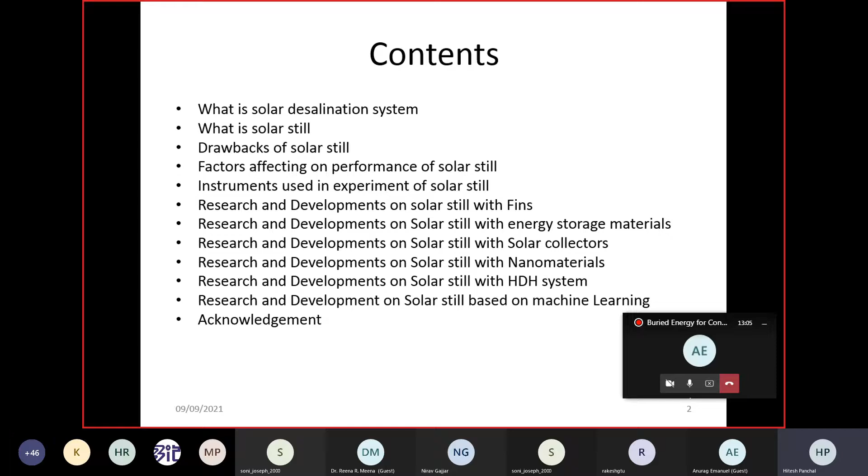After this presentation you will understand regarding solar desalination. These are the contents: what is a solar desalination system, what is a solar still, which is a part of the solar desalination system, the different drawbacks of solar stills, factors affecting performance of solar stills, different instruments used for solar stills, then step by step research and developments on solar stills with fins, with energy storage materials, solar collectors, nanomaterials, then the humidification and dehumidification system. And today, as you all know regarding machine learning, I will also cover some research work done on machine learning based on solar stills, and the latest technology. So these are the contents of my presentation.

Now, this is called a 2 hours lecture. So actually in these 2 hours, it is my duty to tell you about the learning outcomes, meaning what will be learned in this lecture. So after the end of the session, participants will be able to understand: number one, the definition of the solar still, which is basic. Then the different factors that affect the performance of the solar still. Then use of fins, storage materials, solar collector, nanomaterials, and HDH system, etc. And lastly, it is very important to understand future research work on solar stills.

Now in my presentation I have taken certain figures and content. I have filed many patents, so due to filing of patents, it is my duty to explain that whenever you take any figure from anywhere, you have to cite that particular citation, or write that whatever figures or contents you are using are only used for education purposes. I am not going to use any content except for education purposes.

Now these are the Google Scholar citations. Earlier a very good introduction was narrated by the coordinator regarding citations - around 4,000 plus Google Scholar citations I have, and among the 4,035, the H index is 40, and I10 index is 93. What is H index 40? That means there are 40 or more than 40 articles which have been cited 40 times. And I10 index means there are 93 articles which have been cited 10 or more than 10 times. That is why the I10 index is around 93.

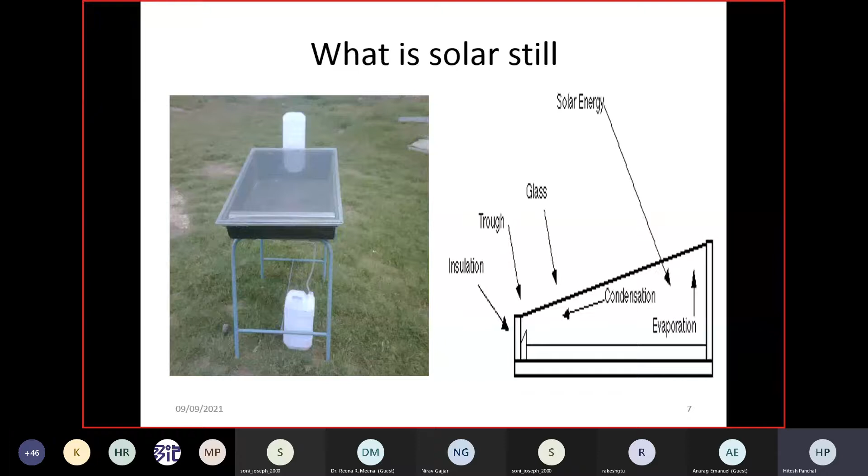So this is the working of the solar still. Actually, why are we working on the solar still or solar desalination system? As we all know, whenever something has a drawback, it is the duty of the researcher to work on it. So actually there are many drawbacks of the solar still, but for easy understanding, I have put only 5 drawbacks. From these 5 drawbacks, you can easily understand about the drawbacks.

The first drawback of the solar still is...

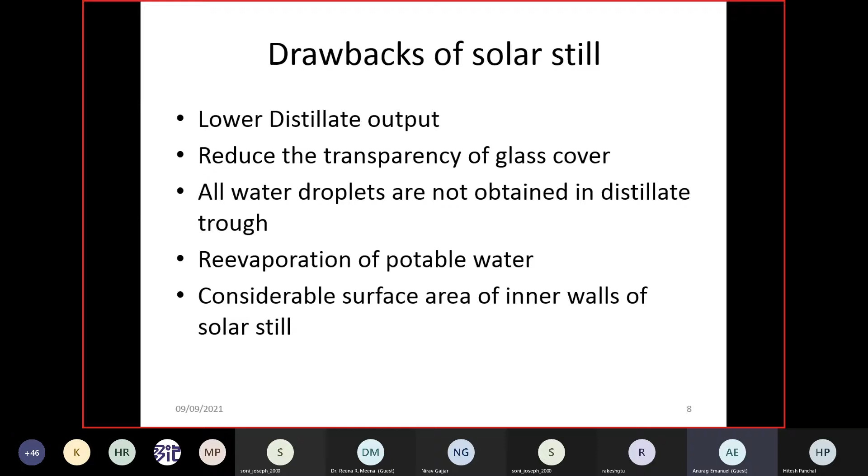Hitesh sir, your audio is not audible. There has been a power failure on Dr. Hitesh Panchal's side. He will join us soon, that's what he has said. So we will wait for him. He'll take a couple of minutes to join. Please be with us and cooperate. Thank you.

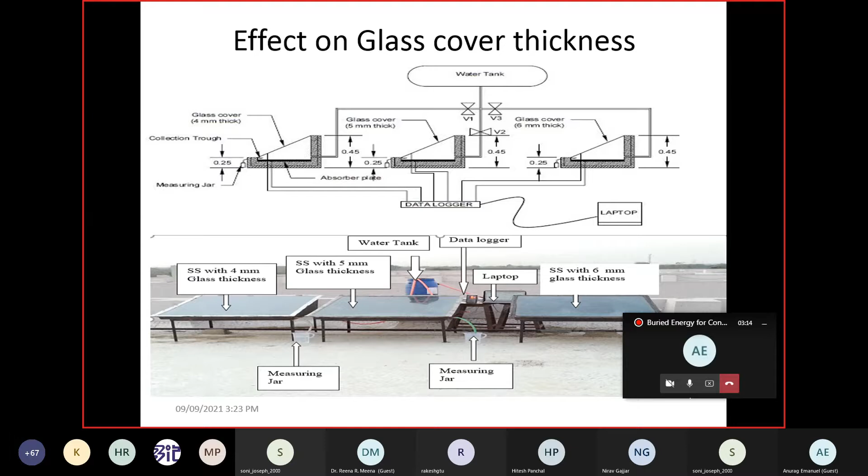So one point we came to know is that whenever the glass cover thickness is lower, the output will definitely be higher. From this experiment, one research article has been published in the IJRER journal, the International Journal of Renewable Energy Research, which is Scopus indexed.

Then the next factor is called the depth of the water. If you see the research article, researchers have carried out research on the variation in depth of water. So if you go for lower depth or higher depth, what is the effect on the distillate output? I have taken one figure for this.

Whenever the depth of water is lower, the heat carrying capacity of the solar still will be lower, and it will release the heat instead of storing it. That is why whenever you are experimenting on a solar desalination system, the depth of water should be as low as possible.

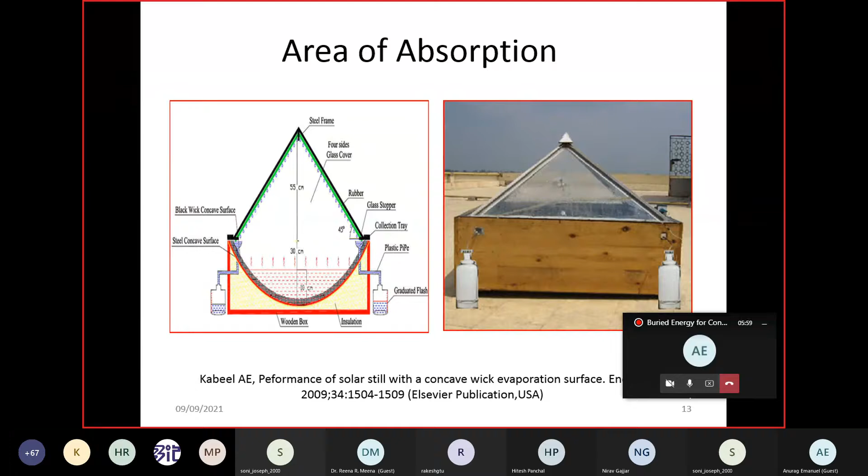Fourth and very important factor is the cooling of the glass cover. Why is cooling of the glass cover required? My dear friend, whenever you work on a solar desalination system, one fundamental point to keep in mind is that your water temperature must be higher and the inner glass cover temperature must be lower, and then your distillate output will be higher.

Now, if you want to increase the water temperature, there are many methods. In this lecture, I am going to show you various solar collectors. If you couple the solar collector, it will supply hot water, improving your output. But how will you reduce the glass cover temperature? For that, cooling is required.

I have taken an example from a figure published in a research article by Dr. Arun Kumar sir. In this research article, they conducted an experiment without cooling and with cooling, on two different days. Without cooling, they took the experiment on April 1, 2010, and with cooling, they took the experiment in May 2010.

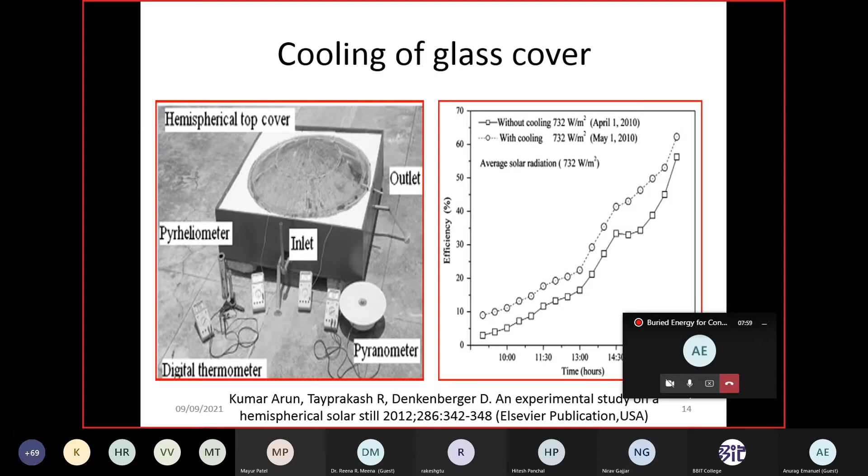So from this graph, we can say that whenever you apply cooling, your output will definitely be higher. That is why we can say that if you go for glass cover cooling, your output will definitely be higher. So from these four different points, my conclusion is very simple: there are many factors which affect the performance of the solar still, but it is up to you which factors you will use to improve the distillate output. And one thing is a fact: whenever you want to increase the output, your water temperature should be higher and the inner glass cover temperature should be lower.

Now, all the factors which I have explained to you have been published in one research article in the journal Renewable and Sustainable Energy Reviews, which is an Elsevier journal. At present, it has an impact factor of around 12. So whenever you are free and have time for research work on desalination, you are requested to read this article. Your fundamentals will be very clear.

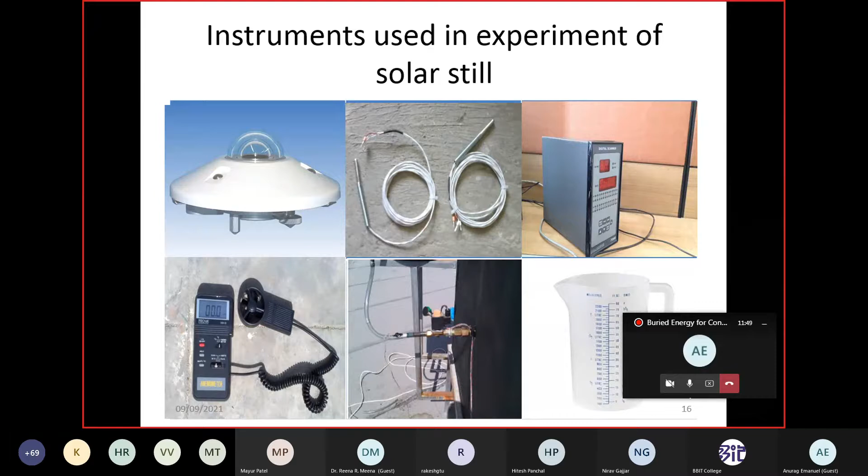How does it work? The working is very simple. Whenever the depth of the water decreases compared with the predetermined level, the float valve will open and water will flow to the solar still basin. And whenever the level is reached, the float valve will go to the upper side and the water inlet will be stopped. So this is the simple working of the level controller. And to collect the amount of water per hour, I use a calibrated flask or beaker. So these are the different instruments we can use whenever we want to do research work on the solar still or solar desalination.

Now, our next point is research and developments on the solar still with fins. Actually, I am a mechanical engineer, and as a mechanical engineer, it is my duty to tell you that whenever you require higher heat transfer, the fin is a very cheap and available alternative.

Okay, the function of a fin is to increase the heat transfer rate. That's very simple, and there are many types of fins, like rectangular fin, pin fin, annular fin, etc. Now, as we all know, in the IC engine, that is the internal combustion engine, suppose I take an example of a bike.

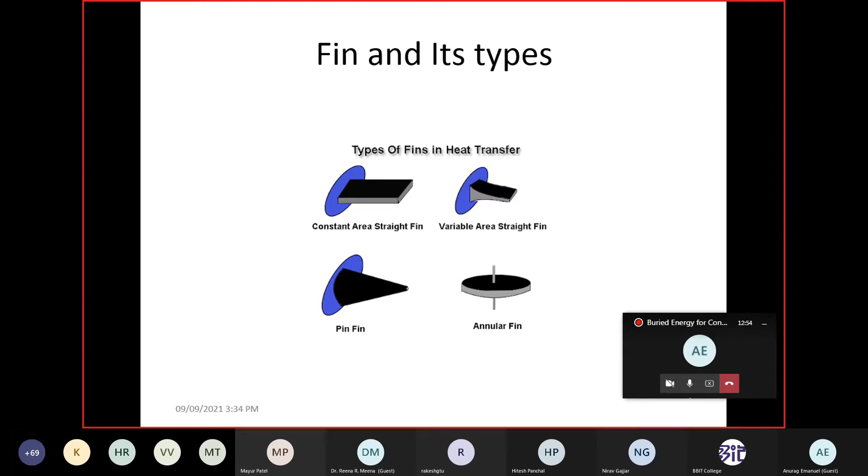In a bike, water is not used for the cooling purpose, but fins are there for air cooling. So the fin has a very good advantage. It is also for extended surfaces, and generally it is used to increase the heat transfer. So the first experiment on fins is vertical and inclined fins with the solar still.

Here you can see I have put one line diagram as well as the experimental setup. In this experiment, three identical solar stills have been taken. One is a conventional solar still, one with vertical fins, and the third one with inclined fins.

Now, why have I put the vertical and inclined fins? As we all know, whenever we use fins, the fins will increase the heat transfer rate, and definitely the output will be higher. That's why I have put the vertical fins. But why have inclined fins been used? Because whenever the fin is in a straight direction,

whenever solar intensity is there, it will create a shadow effect on the water. That is why if you use the inclined type of fin, the shadow effect will be lower. That is why I have put the inclined type of fin.

And from this research work, I came to know that whenever I use fins, definitely the heat transfer rate as well as the distillate output will be higher as compared with the conventional solar still. But not much difference in the distillate output is observed between the vertical fin and the inclined fin.

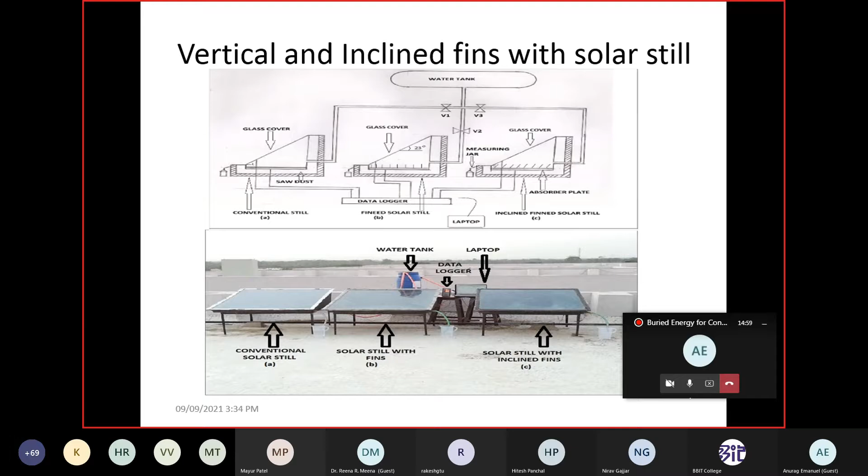Because whenever I use the inclined fin, it will not significantly improve the distillate output, because here the inclined fin has a lower shadow effect. That is why the distillate output is not increased as compared with the vertical fins. So this was the conclusion of my research work on the vertical and inclined fins.

Then the second one is a pyramid type of solar still with hollow circular fins. Actually, there are various types of solar stills: single slope, double slope, and pyramid type. Now in the pyramid type of solar still, what will happen? Your condensation area will be improved. So definitely the output will be higher as compared with the conventional single slope, single basin solar still.

The research work was conducted by my friend from Egypt, Dr. A. Kabeel. They used hollow circular fins attached in the basin of the solar still, and they used three types of solar still: first, a conventional solar still; second, a solar still with hollow cylindrical fins; and third, a solar still with hollow cylindrical fins with phase change material.

So from this experiment, they came to know that whenever the pyramid type of solar still is used with fins plus PCM, that is phase change material, the distillate output will be high. Now let me share why. Whenever you use fins, definitely the surface area of the water will be increased, as well as the preheating time of the water is reduced.

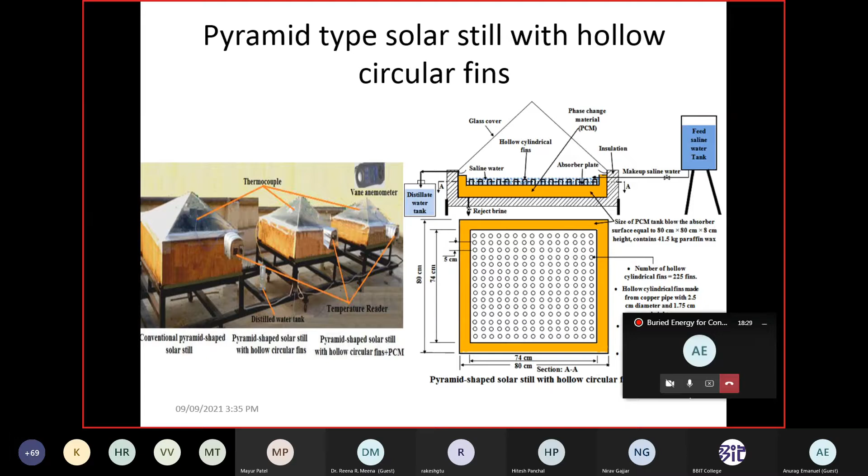That is why we can say that if you want to carry out research work in the solar still with fins, the hollow circular fins are a good outcome. You can use them, and definitely your output will be improved.

Now, the third experiment is between a fin type of solar still, a corrugated solar still, and a conventional solar still. In the figure, you can see that three different solar stills have been fabricated. The area is 1 square meter. The length is around 2 meters, and the width is 0.5, so if you multiply, your area will be 1 square meter. In this experimental setup, the first is the fin type of solar still, the second one conventional, and the third one corrugated.

Corrugated is a very simple fundamental. I think we all know it, like a roof. The roof material is called GI sheet, and that is called corrugated material or corrugated sheet. If you use a corrugated absorber plate or corrugated type of solar still, your surface area will be increased and your output will also be increased. That is why there is a comparison between the fin type and corrugated solar still with the conventional solar still. This experiment has been performed in Egypt.

So from this research work, I came to know that the fin type of solar still and the corrugated solar still have improved the distillate output. Okay, friend. Now let us go ahead.

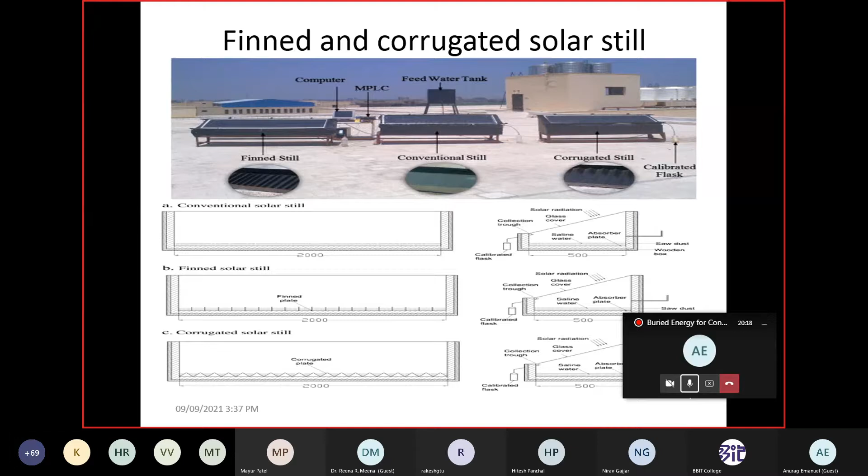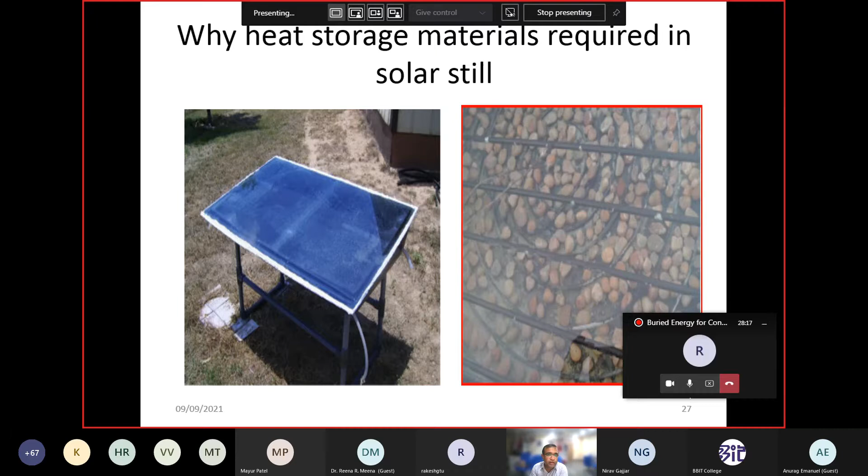The remedy is, if you use sensible heat storage material, such storage material will absorb the excess heat during the sunshine hours, and release that heat during the off-sunshine hours. That is why research has been done, and is going on, on heat storage materials in solar stills.

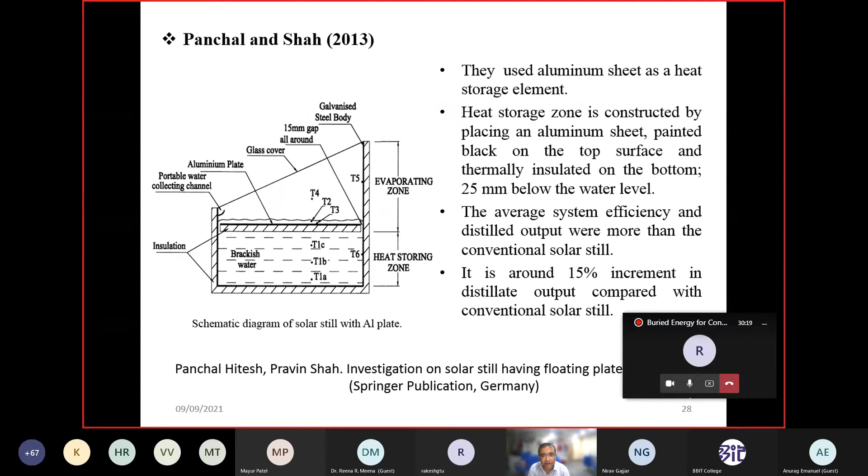So this is a very simple method to increase the distillate output of water with the help of the floating aluminum plate. So from this research work, I came to know that around 15% increment is obtained by this kind of arrangement. Okay, so a very simple experiment that I have conducted, and from this research work, I have published one research article in a Springer publication journal, that is the International Journal of Energy and Environmental Engineering.

Okay. Now, the second experiment conducted by me, in which I have put three similar-size solar stills, in which the first solar still is considered a conventional type of solar still. The second solar still is filled with marble pieces, and the third solar still is used with sandstones. Marble pieces and sandstones are easily available, so we do not pay any money to any person, because they are easily available. And this experiment has been conducted over a 6-month time interval.

And from this experiment, I came to know that marble pieces and sandstones gave higher distillate output as compared with the conventional solar still. But if I compare the distillate output of marble pieces and sandstones, I received higher distillate output for sandstones as compared with the marble pieces. You can see a figure in which you can see the cumulative distillate output. The highest cumulative distillate output is obtained for the sandstones.

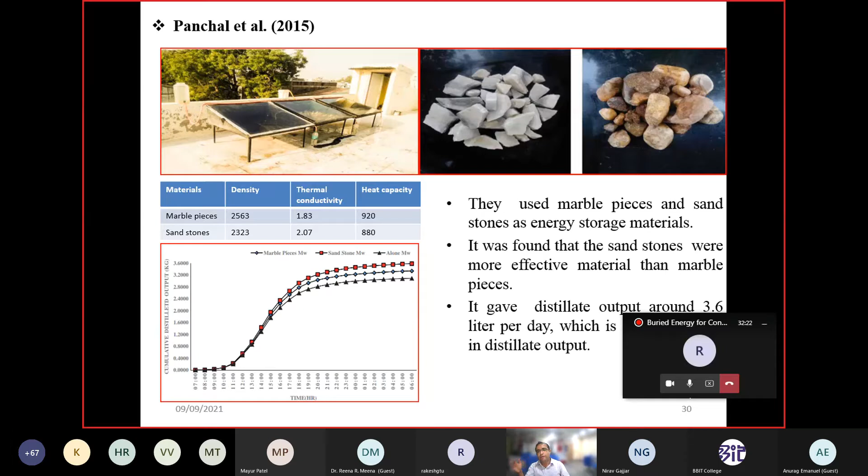So what is the reason? The reason is sandstone is a sensible heat storage material, and it is also a porous material. Due to the pore holes, some of the water is stored, and definitely your output has been improved. So from this experiment, I came to know that sandstone is a very good material, and definitely you can improve the distillate output by use of sandstones in the solar still. Now, from this research work, one research article has been published in the International Journal of Ambient Energy.

Now, the third experiment, that is a solar still with marbles. I think marbles we have all seen. Now, marbles are also considered a sensible heat storage material. So first, one of my students conducted one experiment with the marbles. He took one vessel with water, and then he used marbles. So from his simple research work, he came to know that the temperature of water is increased with the help of marbles. That is why one experiment has been conducted.

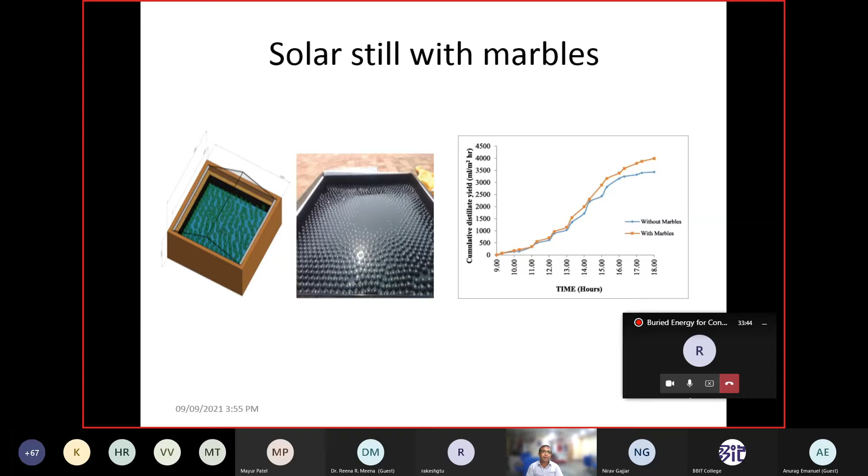Okay, and in this experiment, a double slope solar still has been used, and the comparison is explained in terms of the cumulative distillate output with and without marbles. So you can see that with marbles your cumulative yield will be increased, but this increment is not 50% or 60%. It is around 7 to 10% increment. But yes, marbles are easily available, so you can use such marbles in a solar still to increase the distillate output.

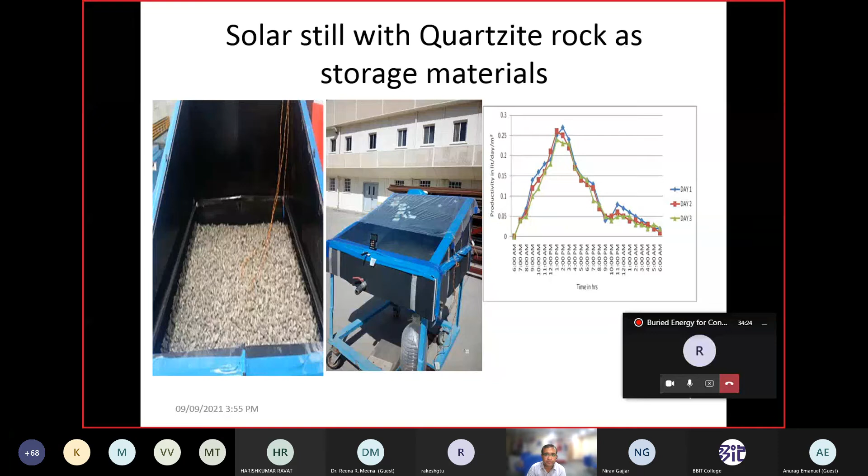Now, the next experiment, that is a solar still with quartzite rock as a storage material. Quartzite rocks are also easily available. So in this experiment, you can see that only one solar still has been used, but the experiment has been conducted with and without quartzite rock, and here a 3-day constant trial has been taken. From this trial, it has been found that quartzite rock is also a good thermal energy storage material, and it increases the distillate output.

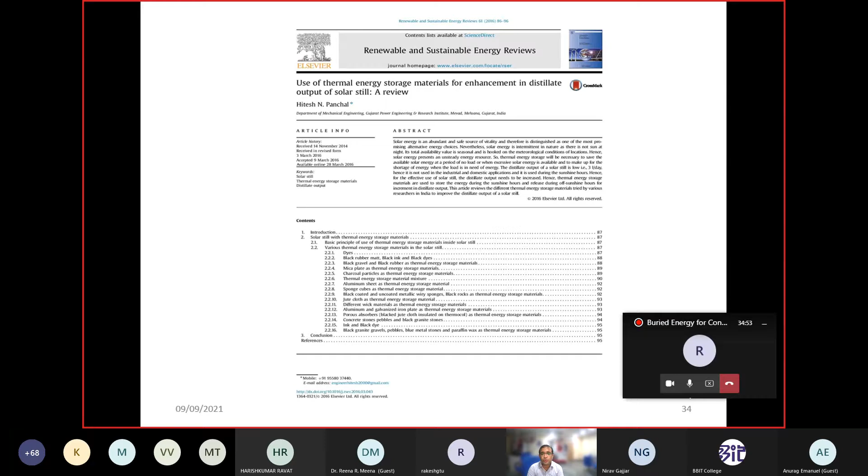Now, from whatever research papers have been published, I have also published one review article in Renewable and Sustainable Energy Reviews. If you read this review article, you will definitely come to know what energy storage material is, especially sensible heat storage material, and what different factors you can consider whenever you use energy storage material. Now, current research work on storage in solar stills. Actually, in the case of solar stills, whatever research work has been conducted by researchers has all used low thermal conductivity materials.

At present nobody has used higher thermal conductivity materials, because whenever you use higher thermal conductivity materials, it will improve the thermal conductivity of water and enhance your output. But one thing you must keep in mind, if you want to use higher thermal conductivity materials, it will also increase the bottom losses. That is why your solar still must be prepared in such a way that the bottom loss is lower. If you prepare the solar still with good insulation material, and then use higher thermal conductivity materials, your distillate output will definitely be enhanced. That is why I've mentioned that researchers can use higher thermal conductivity materials, and they will definitely obtain higher distillate output.

Also, nobody has used the combination of sensible and latent heat storage material. Some researchers have used sensible heat storage material, some have used latent heat storage material, but the combination of sensible and latent is still unattended by researchers. Why? Because sensible heat storage material stores heat during sunshine hours. And for the latent heat storage material, suppose I use a low temperature phase change material with a melting point of 50 degrees. Whenever 50 degrees is reached, the latent heat storage material will release the heat, so the temperature rise will be there. So this combination has very good research criteria. If you want to work on solar desalination or solar still, you can use the combination of sensible and latent heat storage material, and compare the output with the conventional solar still.

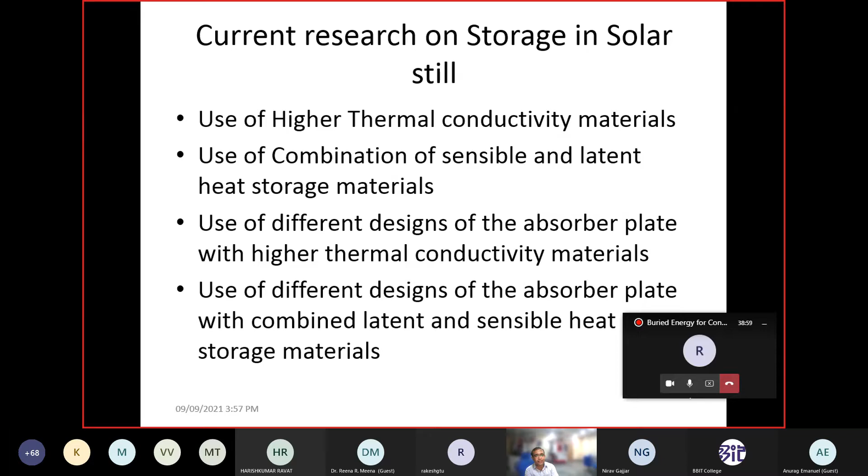Now the third point, research and development on solar still with solar collectors. A solar collector, as we all know, collects solar energy and increases the temperature - that's the simple definition. But we must understand why solar collector coupling is required with the solar still. The answer is simple: the distillate output obtained from the solar still depends on two parameters - higher water temperature in the basin and lower inner glass cover temperature. If you want to increase the water temperature, a simple method is to couple the solar collector, because the solar collector will supply hot water into the basin.

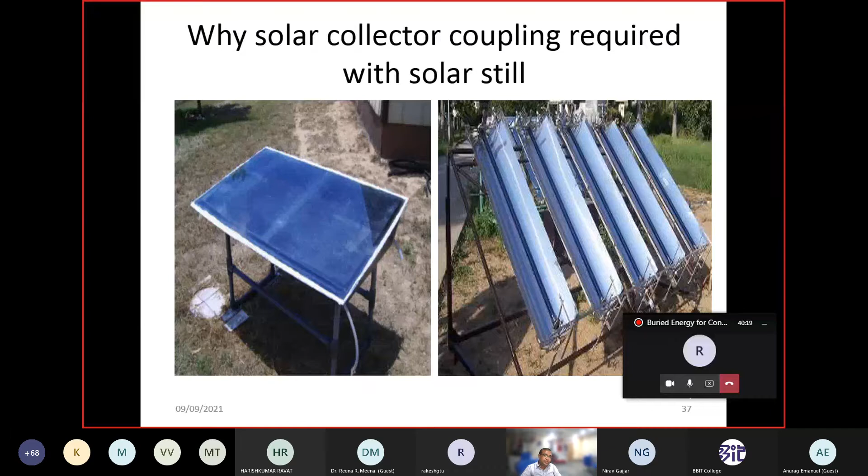Whenever hot water is supplied to the basin, it requires less heat for evaporation, and definitely your distillate output will be higher. That is why solar collectors have been used by many researchers to increase the distillate output of solar stills.

The first experiment was performed by Dr. G.N. Tiwari sir from IIT Delhi during 2009. During this experiment, they used a flat plate collector, FPC. A flat plate collector is a very simple collector. Earlier it had been used by many researchers, but the cost is somewhat higher. So how does this system work?

In this system, a flat plate collector is used, and water from the basin is supplied to the flat plate collector with the help of a pump. So you require a pump. The pump will supply water towards the flat plate collector. The flat plate collector has copper tubing or piping which takes the sun rays and increases the water temperature. So the outlet of the flat plate collector has higher water temperature compared with the inlet, and that hot water will go to the basin. This cycle will be continued.

From his experiment at IIT Delhi, they concluded that the maximum distillate output of the solar still with a coupled flat plate collector reached up to 6.75 liters, for the month of October.

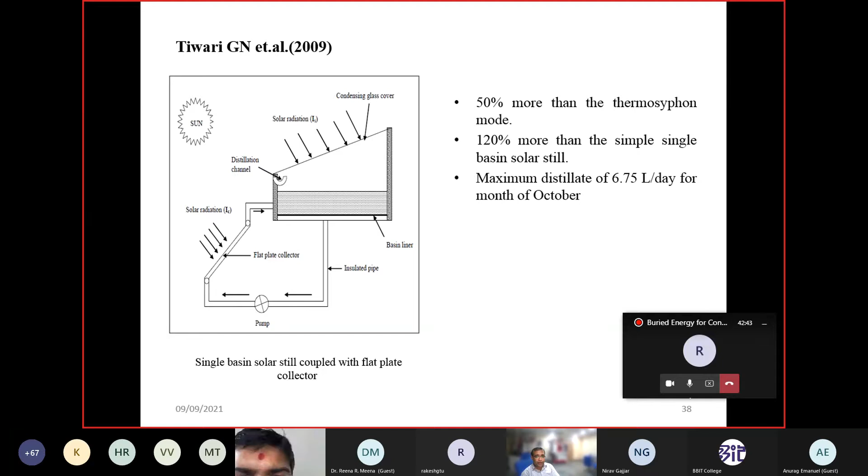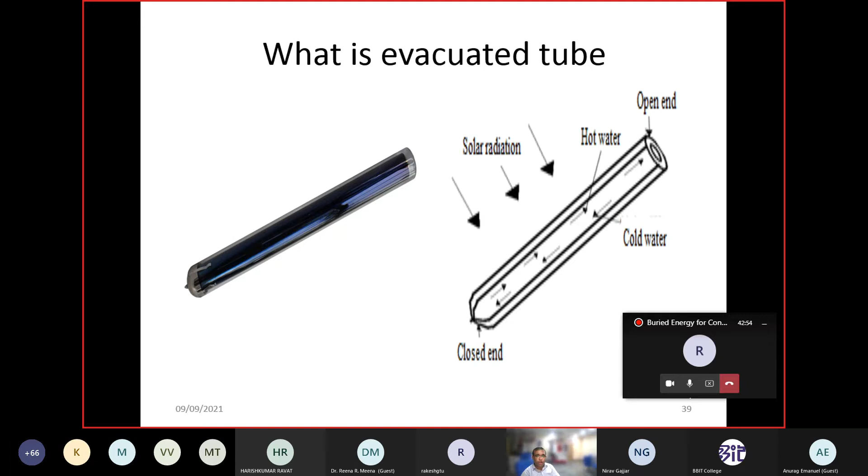So the peculiar property of this setup is that, first, you don't require any kind of pump. Second, the tubes are directly coupled, so no coupling is required. In the case of a flat plate collector, you have to use coupling to connect it with the solar still, but here you don't require any kind of coupling.

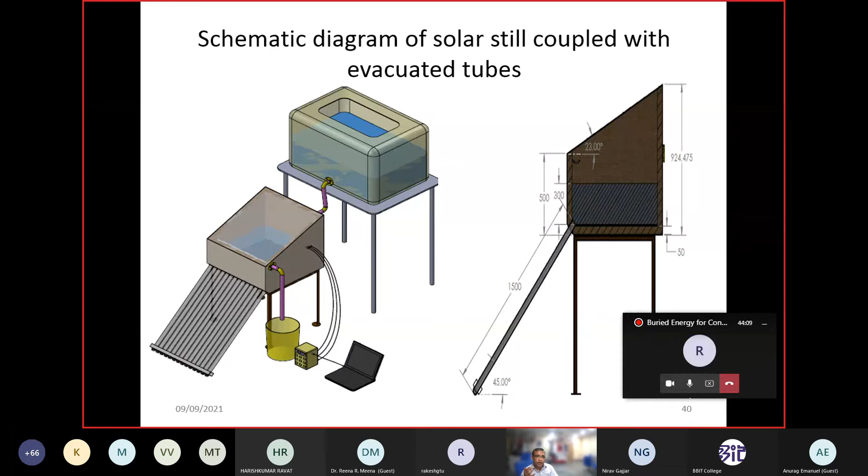Now this is the setup of the solar still with evacuated tubes. From this research work, one research article was published in the Heat and Mass Transfer Journal, which is an SCIE journal. In this journal I conducted the theoretical analysis as well as the experimental analysis, and compared the theoretical and experimental results, and I received very good agreement between them.

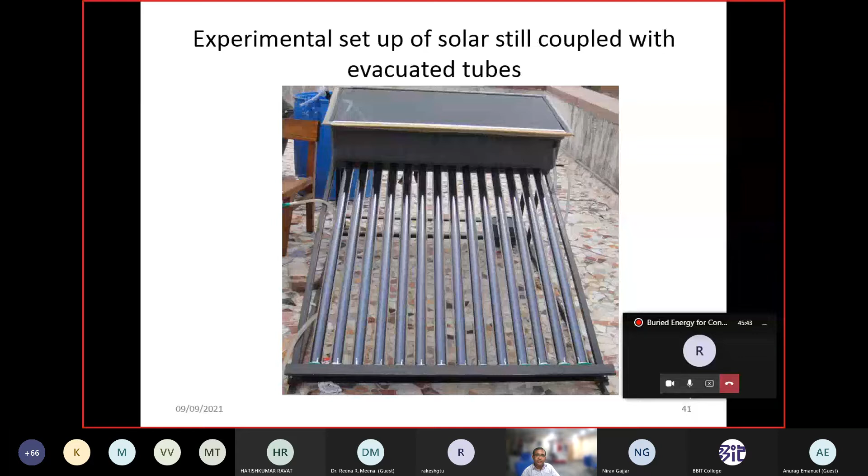Earlier I showed you the single basin solar still. Then I conducted an experiment with the double basin solar still. Why double basin? In a double basin solar still, whatever heat is lost to the atmosphere from the lower basin is utilized to increase the water temperature of the upper basin, which also receives sun rays directly. This is a good combination, since you obtain distillate output from both the upper and lower basins.

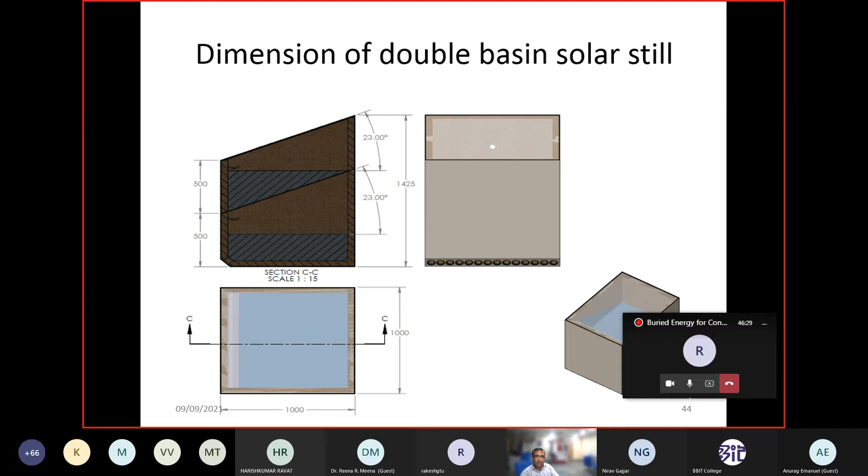This is the dimension of the double basin solar still, and this is the experimental setup with evacuated vacuum tubes. The working is simple: the upper and lower basins are filled with water. In the lower basin, the vacuum or evacuated tubes are coupled, so cold water goes to the downward side of the tubes. It absorbs sun rays, becomes hot water, and due to the thermosiphon effect, the hot water rises into the basin.

Now when water is formed from the lower basin, some heat is normally lost to the atmosphere. But here, instead of the atmosphere, we have attached one more solar still, so that heat is utilized to increase the temperature of the upper basin, which also receives sun rays directly. From this design you obtain distillate output from both the lower and upper basins, and this kind of solar still can produce around 10 liters of water.

Suppose I take a problem definition requiring a solar still for a small family of 2 adults and 2 children. This design is better because, as per WHO guidelines, one adult drinks an average of 3 liters of water per day, and a child drinks about half that, 1.5 liters. So for 2 adults and 2 children, the total consumption is 9 liters.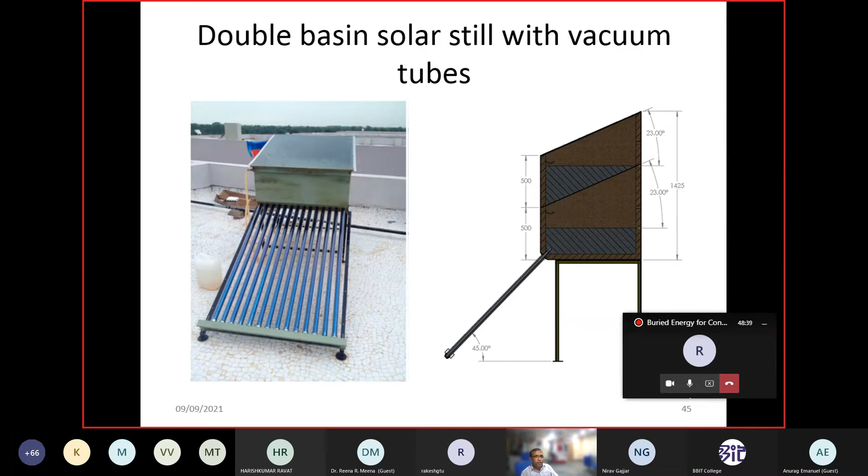This double basin solar still with vacuum tubes gives an average distillate output of around 10 liters, and its energy payback time is less than 1 year, meaning after one year whatever money you spent will be recovered. So this is a very good design, with distillate output of around 10 liters of water per day.

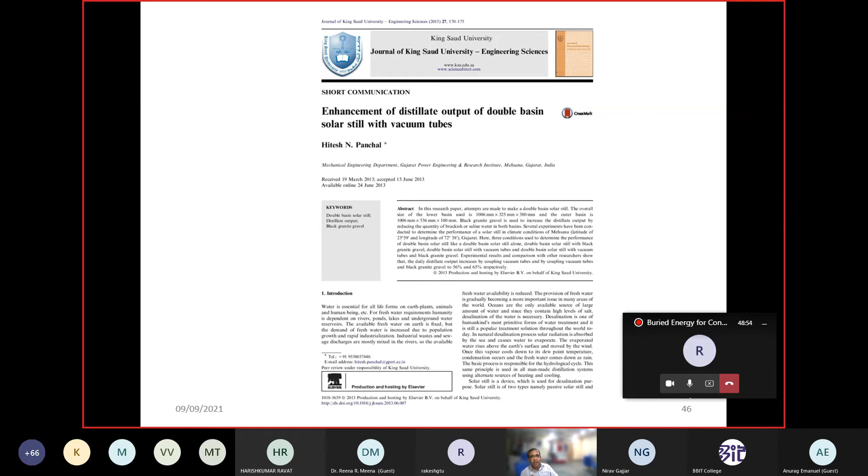From the double basin solar still, one experimentation has been conducted, and the results have been published by the Journal of King Saud University, an Elsevier publication journal. One more research article has been published in the Desalination Water Treatment Journal, an SCIE journal of Taylor and Francis.

Then I conducted one more experiment with a triple basin solar still. First I conducted experiments with single basin, then double basin, and then triple basin. In the triple basin, instead of a simple absorber plate, I used a corrugated design, and instead of vacuum tubes, I utilized evacuated heat pipes. So how does it work?

The heat pipe heats the water, so the temperature of water in the lowest basin rises and you obtain distillate output. Whatever heat is lost from the lower basin is utilized to increase the temperature of the middle basin, which takes heat from the lower basin, increasing its own temperature and producing distillate output as well. Whatever heat is lost from there is utilized to increase the temperature of the upper basin, which also comes directly into contact with sun rays.

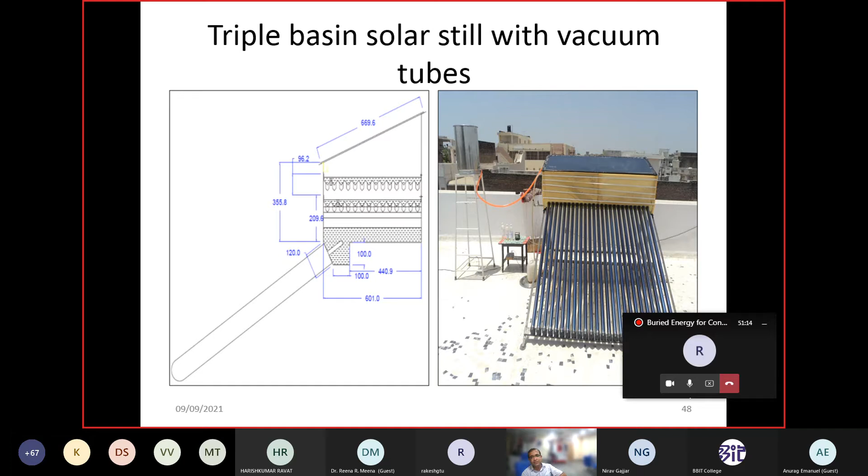Now, from this evacuated tubes research work, one article has been published in Groundwater for Sustainable Development. An article has been published by me in which I have used a single slope, single basin solar still with calcium stones, that is called the sensible heat storage material. This article has been published in the Process Safety and Environmental Protection journal. That's an Elsevier publication journal, and it has an impact factor of more than 6.

Now, after the flat plate and evacuated tubes, some researchers have also used the solar still with the parabolic trough collector. Now, what is a parabolic trough collector? The parabolic trough collector is a collector in which you can see the parabola shape, and in the middle you will obtain the concentrated tubes, or receiver tubes. Whenever the sun rays are incident on the parabola shape, those rays will be reflected towards the receiver tube. And if you supply hot water or heat transfer fluid to the receiver tube, the temperature of the water or heat transfer fluid will be raised.

Now, how does this system work? You can see one oil tank is there. From this oil tank, one pump is put. Whenever the pump is operated, the oil will be supplied into the receiver tube. The receiver tube will receive the sun rays and it will increase the temperature. So the oil will possess a high temperature, and the high temperature oil will go to the solar still. Now in the solar still, there is a zigzag type of connection, that's called a heat exchanger. It passes through the heat exchanger and then further goes to the oil tank.

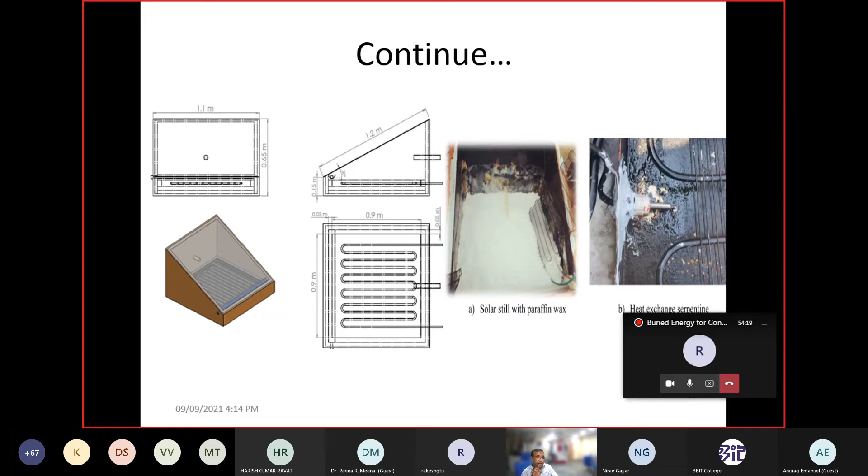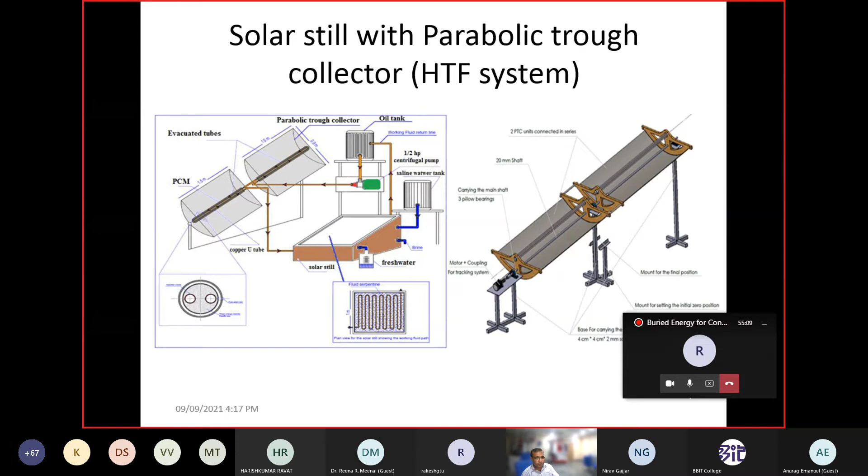So friends, you have seen that there are two types of design. In the first design, the parabolic trough collector uses the heat transfer fluid, and in the second design the parabolic trough collector uses water. But in both cases, the distillate output will be higher than in the case of the solar still coupled with the flat plate, when the solar still is coupled with the parabolic trough collector and heat transfer fluid.

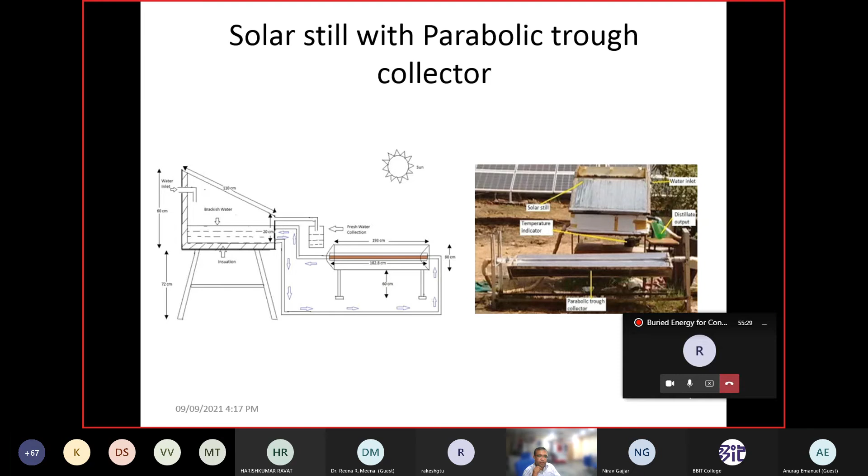Now, if you want to carry out research work on evacuated tube collectors with the solar still, here I have put 4 points. The first point is that you can carry out research work on evacuated tubes with the solar still integrated with fins. Fins we have studied. Fins will increase the surface area and also reduce the preheating time of water. But nobody has yet applied their mind to use fins in the solar still coupled with evacuated tubes, because if you use fins with the evacuated tubes, your surface area will be increased, the water temperature will also increase, and your output will be increased. Second, you can also use the evacuated tubes with the solar still and a condenser.

Okay, earlier I have already shown you one picture in which I have used a solar still with the evacuated tubes and condenser. Why this combination? Because if you use the evacuated tubes, it will supply hot water, so the temperature of water will be increased. And if you use the condenser, the condenser will increase the condensation. So the inner glass cover temperature will be lower, and higher water temperature and lower inner glass cover temperature will increase the distillate output. That is why this is a good concept through which you can carry out research work, and definitely your distillate output will be higher.

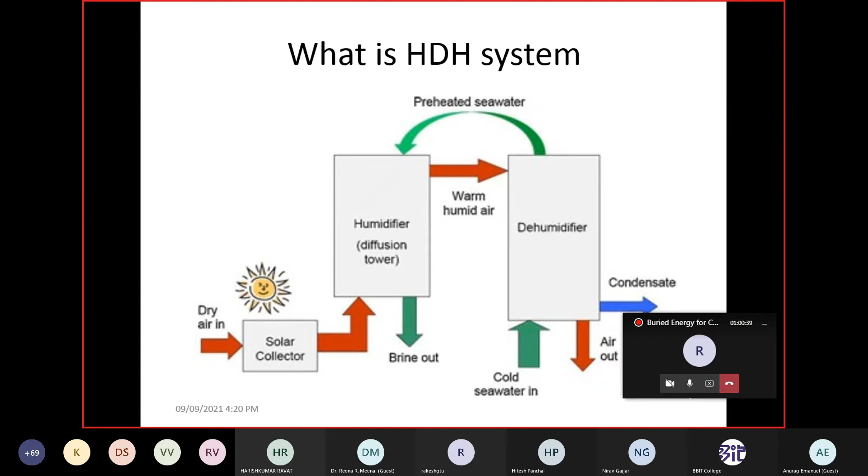In the dehumidifier, there is a heat exchanger. Cold water is flowing, and it will absorb the heat, and dehumidification will occur, and from the warm humid air you will obtain the water droplets. So this is the function of the humidification and dehumidification system, and this system requires two important devices called the humidifier and dehumidifier.

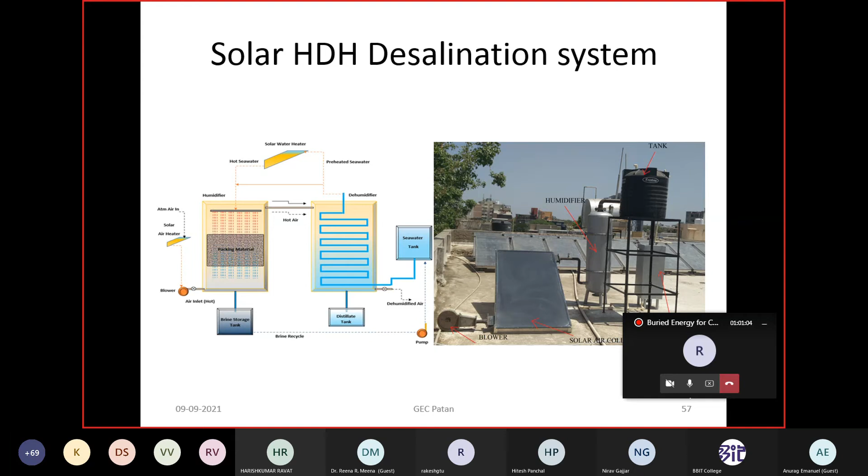Now this is the line diagram and experimental setup of the solar HDH desalination system. In this system, you can see the humidifier. It will supply the humid air to the dehumidifier, and in the dehumidifier the water is obtained. This is a line diagram of the humidifier.

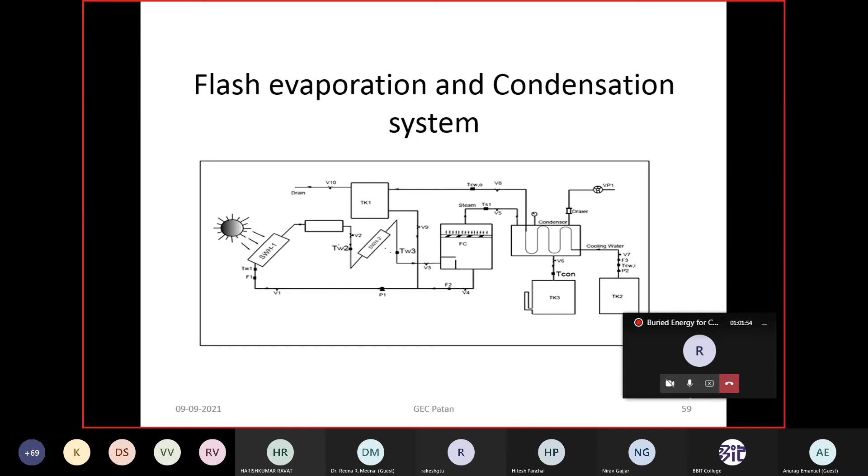Now if I combine the HDH system and the second one, that is called the flash evaporation and condensation system, that's called the hybrid desalination system. This whole system is a combination of two different systems. That's why it is called a hybrid system. And this system has been designed to obtain distillate output around 50 liters of water per day.

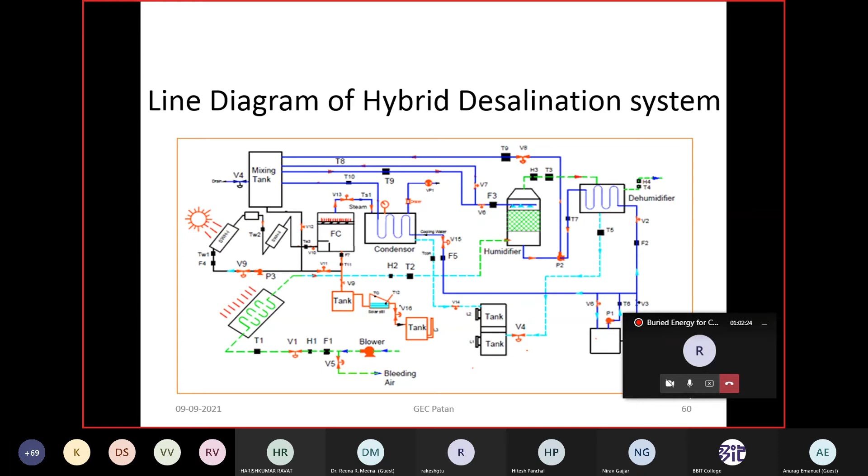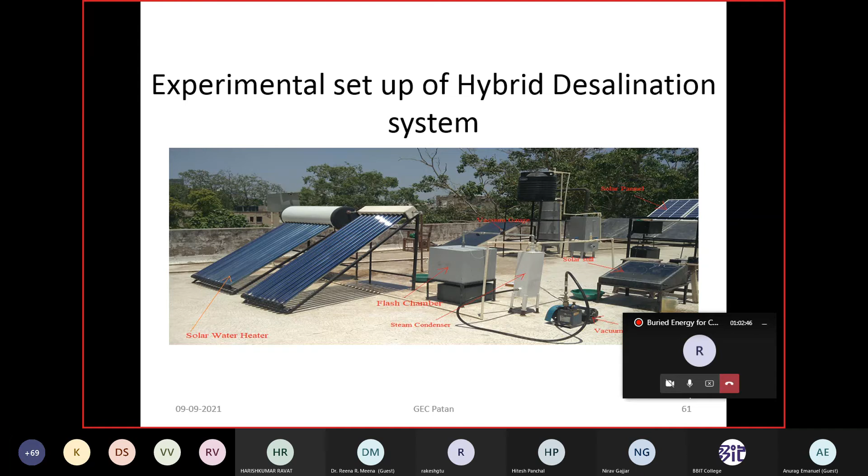And this is the experimental setup of the hybrid solar desalination system. Here you have seen, this is a line diagram. These are all the components. You can see the solar water heater, a flash chamber, a steam condenser, and a vacuum pump. The flash chamber as well as the steam condenser are very important devices.

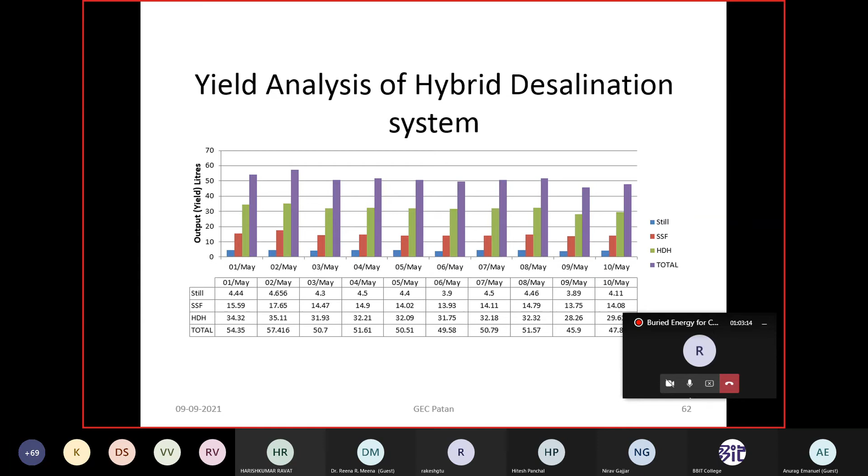Now from this research work, one research article has been published by myself and my group, Kishore Kumar sir, Ramanna sir, Suresh sir, Israr sir, Mohammed, Eklavi sir, Hagar ma'am, and this paper has been published in the International Journal of Ambient Energy.

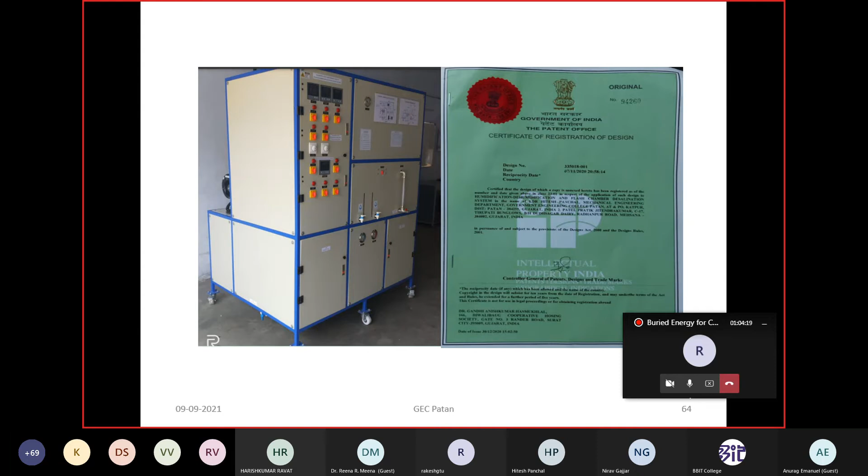Now, what are the current research works on the HDH system integrated with the solar desalination system? First of all, it is possible to integrate the HDH system with the solar still and single and double flash chamber. So friend, the single stage flash chamber I have already used, but the double stage flash chamber is still unattended by researchers, and it is possible that this whole system can be converted from 50 liters to 500 liters with the help of the double stage flash chamber and certain modifications in the design.

And second, it is also possible that this system can be combined with the solar dryer, because whatever air is lost from this system can be utilized in the solar dryer for drying purposes. So these are the two points that I can discuss as current research works on the HDH system.

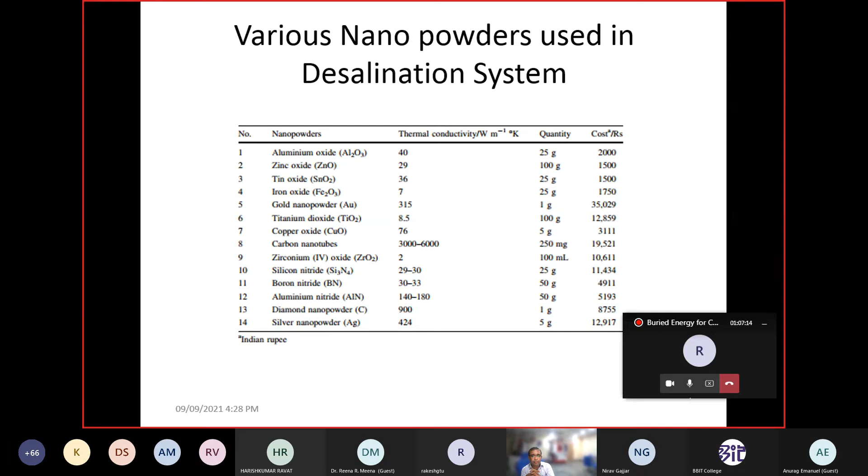Now among all these nano powders, as a researcher, we must understand that the cost should be as low as possible. So from this figure you can see the lowest price is around 1,500 for zinc oxide.

Now I have conducted one experiment. In this experiment, I have taken three nanomaterials: zinc oxide, tin oxide, and aluminum oxide. From this research work, I came to know that the aluminum oxide nanofluid possesses a higher distillate output as compared with the zinc oxide and SnO2. The reason is very simple. The thermal conductivity of Al2O3 will be higher as compared with the zinc oxide and SnO2.

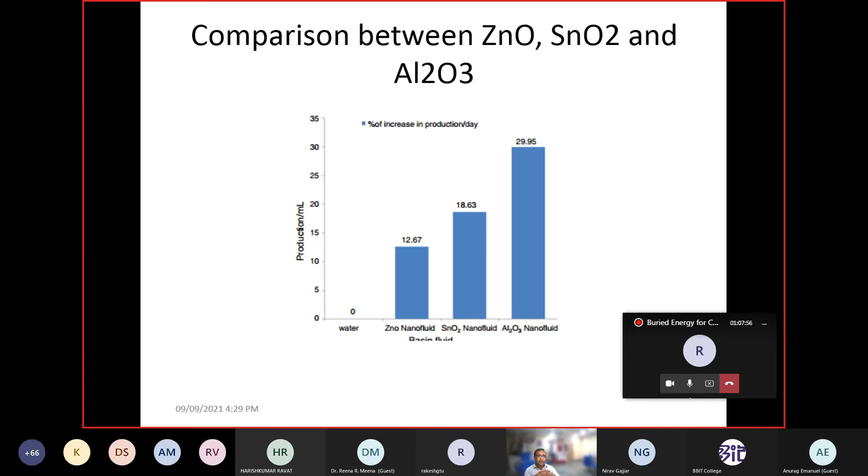This is also an experiment that is conducted for a solar still with the condenser and nanofluid. Actually, the basic idea of this kind of experimentation is, earlier we have discussed that higher water temperature will increase the output, and the lower inner glass cover temperature also increases the distillate output. So if you use the nanofluid, mix it with the water, pour such kind of fluid in the solar still, and use a modification in the design, definitely your surface area will be increased, and due to use of the nanofluid, thermal conductivity will be increased. So temperature of water will be increased.

And if you use the condenser, the condenser will reduce the inner glass cover temperature, and your distillate output will be improved. So the basic aim of this research work is to increase the distillate output by increasing the water temperature and reducing the inner glass cover temperature. That is why this experiment has been conducted by Dr. A. E. Kabeel sir in the climate condition of Egypt.

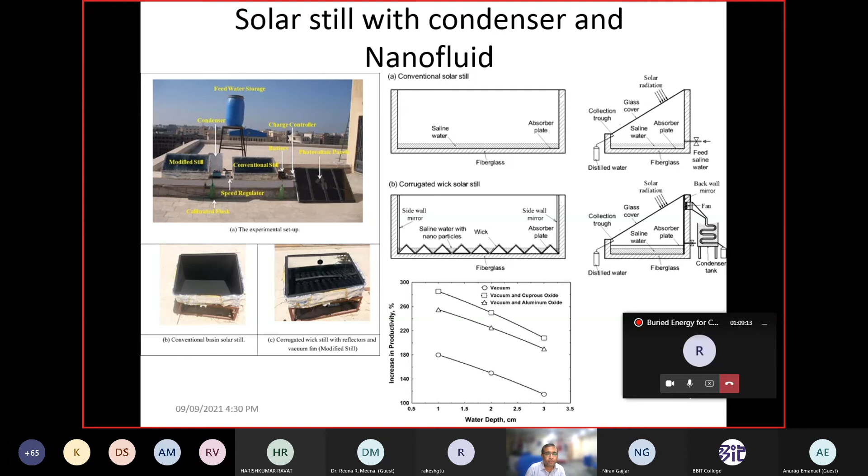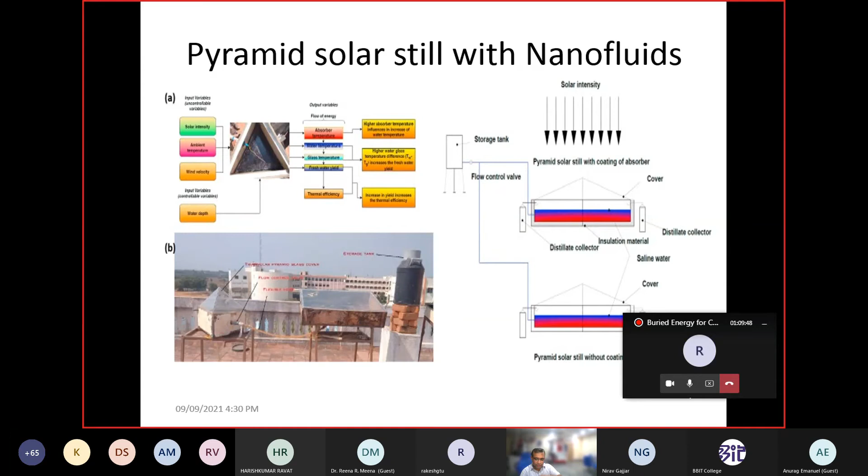And from this research work, one research article has been published by my team in the Journal of Cleaner Production. It is a very good international journal, and it has an impact factor at present above 9. So this article has been published.

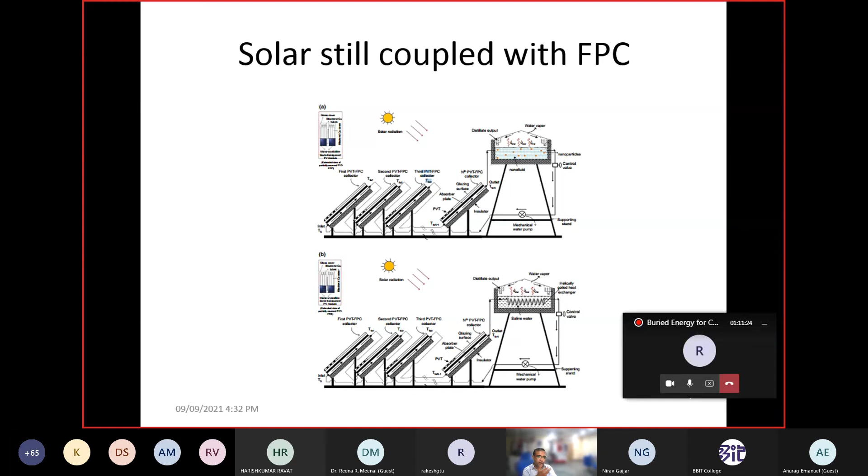The third research work has been completed by Dr. G.N. Tiwari sir, in which they have used a flat plate collector, and the flat plate collector is coupled with the double slope solar still with use of a heat exchanger, and they have also used nanoparticles. So the distillate output will always be higher if you use the flat plate collector with the nanoparticles.

This is also one good research work conducted by Dr. A. E. Kabeel sir, in which they have used nanoparticles, or nanofluids, in a solar still, and they also applied vacuum. Now one question arises in our mind: why is the vacuum used? So dear friend, it is a very simple fundamental. Whenever you apply vacuum, it is possible to evaporate the water at a low temperature. That is why if you use vacuum, you can produce the water vapor at low temperature. That is why vacuum has been used.

So the combination of vacuum with nanofluids as well as a condenser will definitely increase the distillate output, because vacuum and nanofluids will increase the water temperature, and a condenser will reduce the inner glass cover temperature, and higher water temperature and lower inner glass cover temperature increase the distillate output.

This is the research work that has been conducted by me. In this research work, I have taken two similar types of solar still. One is the conventional, and the second one is a modified solar still. In the modified solar still, I have mixed a percentage of manganese oxide nanoparticles with the black paint, and painted it on the absorber plate as well as the side covers.

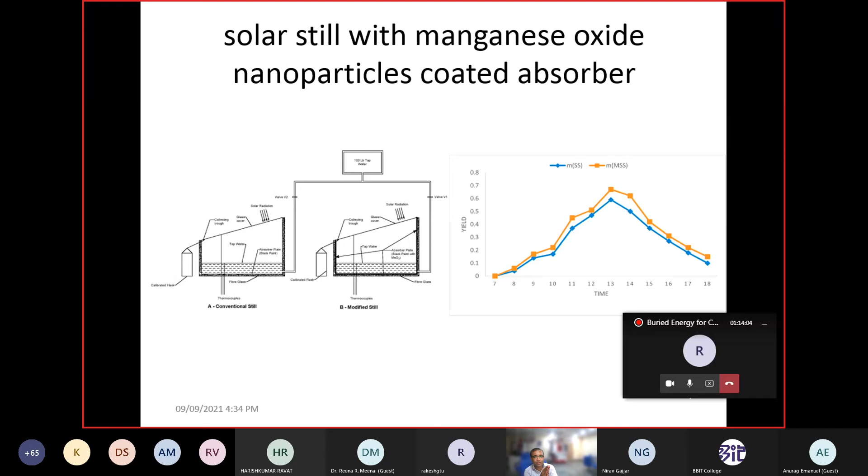So what will happen if you mix manganese oxide nanoparticles with a paint and then apply the painting on the walls as well as the absorber plate? Definitely it will absorb more heat, and it will increase the temperature. So definitely you will improve the distillate output with the help of mixing nanoparticles with the black paint. And that is why you can see one graph is there. From this graph you can see the distillate output is higher for the modified solar still as compared with the conventional solar still.

From this research work, one article has been published in the Case Studies in Thermal Engineering journal, a reputed international journal of Elsevier, which has a quartile of Q1, and the impact factor is around 4.8. So if you want to carry out some research work on nanoparticles in solar stills, you can see the research paper, and definitely you will understand, and you can carry out research on the solar still with mixing of nanoparticles and black paint. Now, what are the future research works?

So friend, actually I have published one review article in an Elsevier journal, but at present the proof is not available. All the notations I have already written: the overall productivity enhancement by the nanoparticles should be examined for different climate zones to achieve more comprehensive data about the technique. Because suppose I have used the solar still at Patan, Dr. Kabeel has used the solar still in Egypt, Dr. Kishore has used the solar still in Qatar. But comprehensive data are still missing at present.

Second one, long-term operational stability and life cycle assessment are critical issues, because nobody has published any research articles on the long-term operational stability and life cycle assessment of nanoparticles in solar desalination systems. Third one, numerical and mathematical modeling and obtaining correlations for estimation of productivity and heat transfer coefficient are still unattended by the researchers.

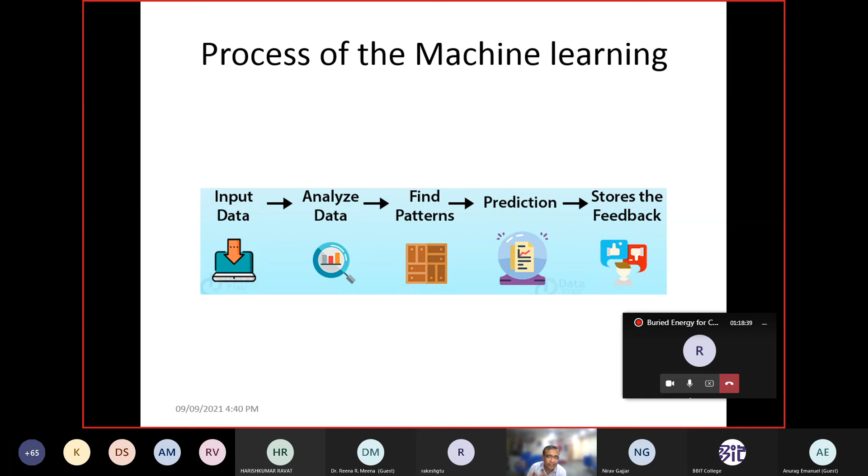And then you have to apply your random forest to the artificial neural network. Here there are 5 inputs: 3 temperatures, 1 velocity and 1 intensity, and the output is only one, that is the distillate output.

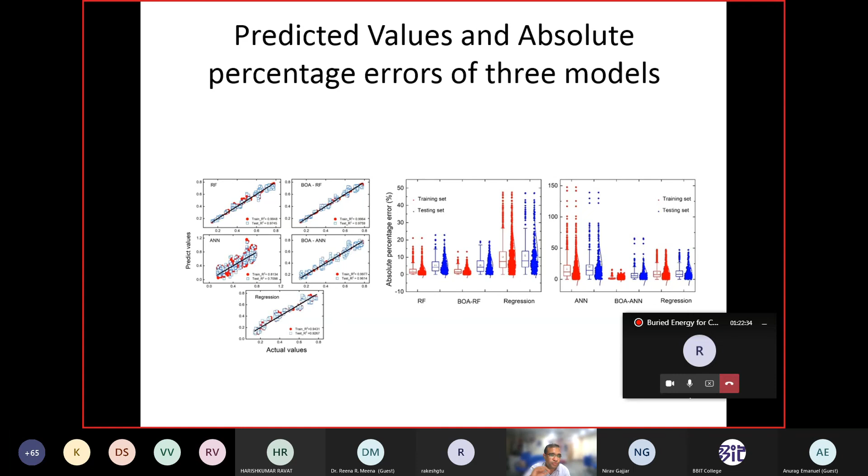Earlier, some researchers have carried out the validation with the help of CFD software, or used models. If you add the values to the model, you can get the results in terms of correlation.

Now from this prediction performance, these are the 5 models: RF, called random forest; ANN, called artificial neural network; BOA stands for Bayesian optimization algorithm; then BOA ANN; and regression.

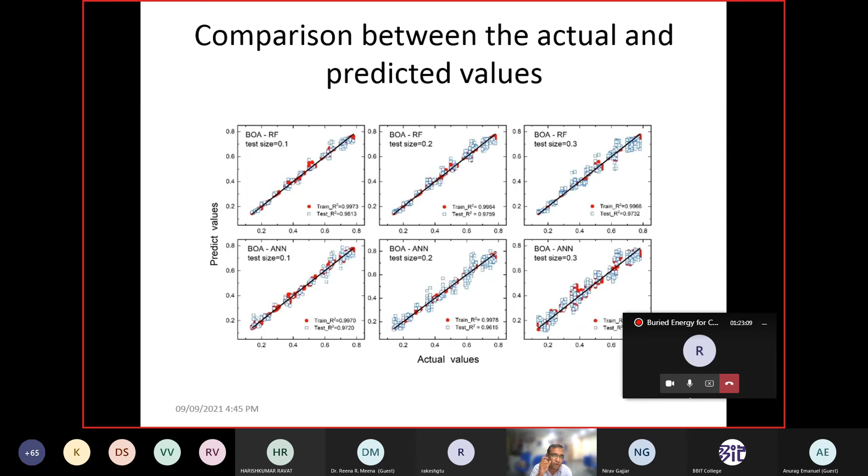This is also a comparison between the same value, that's the actual and predicted. Whatever results I have shown, I have taken from the research article published in 2021 by friend Dr. A. E. Kabeel sir. So friend, this is all about machine learning.

Whatever research that has been conducted by me during the PhD work, I received a grant from Gujcost. It was around 5.50 lakh rupees. And the second grant I received from the scheme of Young Scientists and Technologists, that is DST, from which I received 9.55 lakh rupees.

Single basin, double basin, triple basin solar still research that has been performed from the Gujcost grant, and the HDH system, that's the humidification and dehumidification system research work, that has been conducted from the grant available from SYST, that's the scheme of Young Scientists and Technologists. Thank you very much.